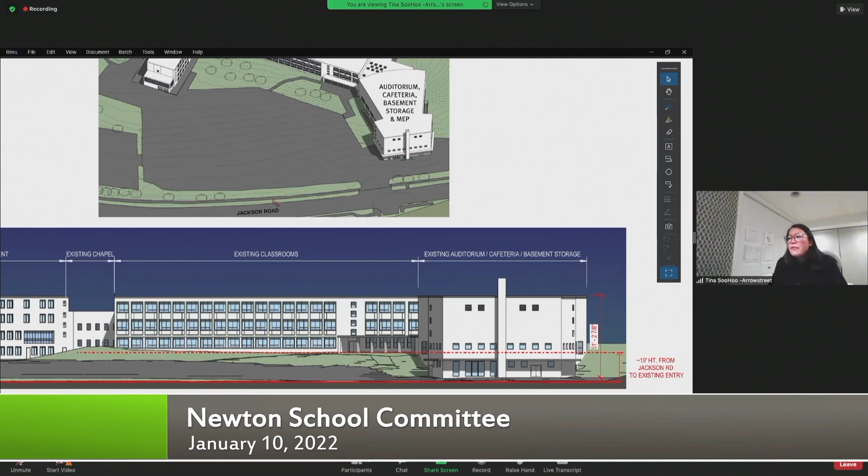And then this lower level is the basement. It's basically like a walkout basement where there's the mechanical rooms, the boiler rooms, and storage. But you'll notice there's a dashed line here — that's actually the first floor of the classrooms, and then the solid red line is the street. So there's a 19-foot height difference from the street, from the sidewalk, up to the first floor of the classroom. We wanted to point that out because when you're out on that site, it's a little hard to tell, since there is quite a length from the road to the front door.

These are a couple of building sections, and I'm going to zoom into this key plan so you can see where the sections are cutting through. The first section cuts right through the classroom bar and across the site, across the parking lot.

To Jackson Road. The second building section cuts through the lobby, the existing lobby, and right through the auditorium. Below the auditorium is the cafeteria, and below that is the basement where the Newton School storage, maintenance, and workshop are located.

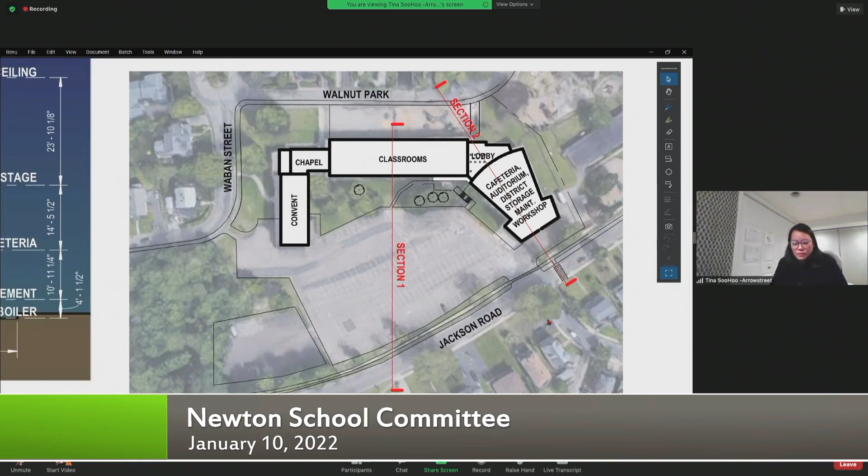So first I'm going to point to this site here. This top diagram is cutting through the classrooms, and you can see it's quite a distance from this exterior wall across the site to the street.

Again, it's a 19-foot height difference, and this distance is approximately 300 feet. So we have that distance, but we also have that height to deal with. Bringing pedestrians up 19 feet, we have to think about steps, stairs, and ramps that are accessible and meet code.

This other building section is cutting through the lobby, as I mentioned, and through the auditorium and the cafeteria. You can see that several floors, or a portion of the floors, are submerged in the grade because of the sloping nature of the site.

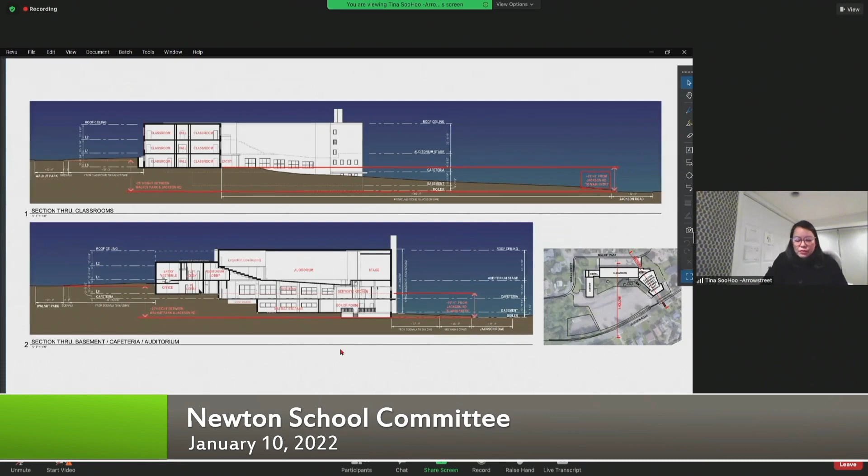So they're able to take advantage of having a fair amount of storage below, but also access from the street. There are also some half levels that take you down to the cafeteria and up a level to the auditorium. So internally, there are some heights that we are also managing with this design.

And on to design options. When we last presented to the school committee, we presented some ad/reno options, and we also presented some new construction options. The new construction options are now eliminated, and we're looking only at addition renovation options.

We had presented 6 of these options, and since then we've further developed and studied a few more, so now we have a total of 14 options that we're looking at here. A lot of these options are really trying to study the relationship of the new addition to the existing building, making sure that the space programming and educational plan fits within the existing building as well as the new addition.

We looked at potentially demolishing a little bit more of the existing building and potentially providing a slightly larger new addition. And then similarly, we looked at a number of site configurations.

Meaning where the blue zone may be in relationship to the site and the building, where the van drop-off and pickup locations are, as well as the bus, and those relationships to each other are very important for how you approach the site, and from those drop-off and pickup points to the building entry, but also looking at where the main entry may be, where secondary entries are, as students approach the building from all sides.

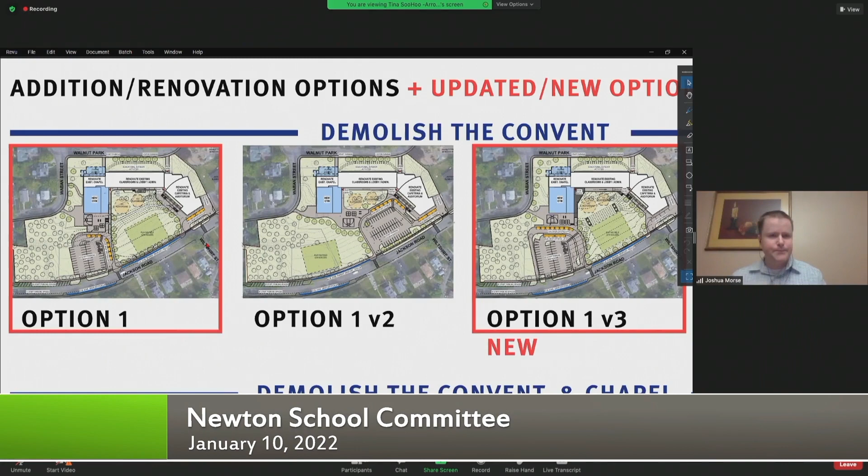Yes, absolutely. As Josh had mentioned, the cafeteria, it makes sense to try to renovate that, but also carve out some space that maybe can be used, for example, we had studied potentially an art room or music room. It's adjacent to the cafeteria, and there's space for that, but also maintaining the necessary area for a cafeteria. It makes sense to potentially keep the kitchen where it is, obviously renovated with new equipment, so it's up to date and serves the needs that the school needs.

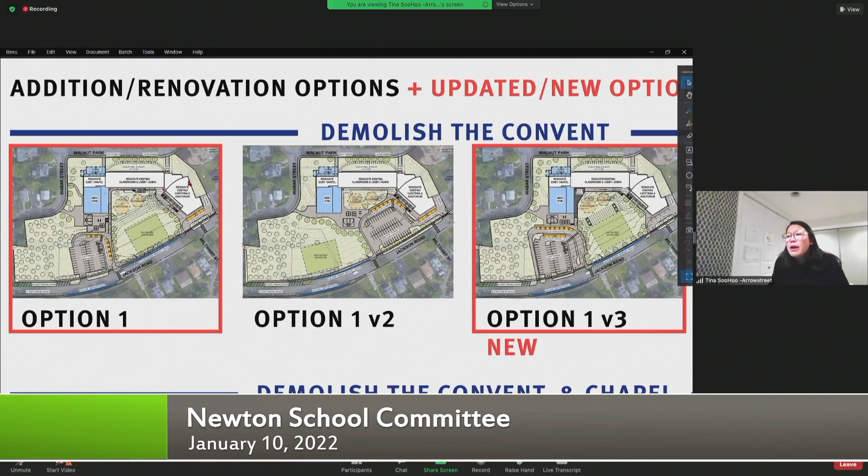However, you'll also notice that in a lot of these schemes where we are keeping the auditorium, we're adding a gym. So the new addition is a gym, since the existing building does not have any sort of gym space, or any space that's large enough for a gym, which is approximately 6,000 square feet. And with that, there's also some additional new spaces that would be required to meet the space summary and the program that the school is requiring.

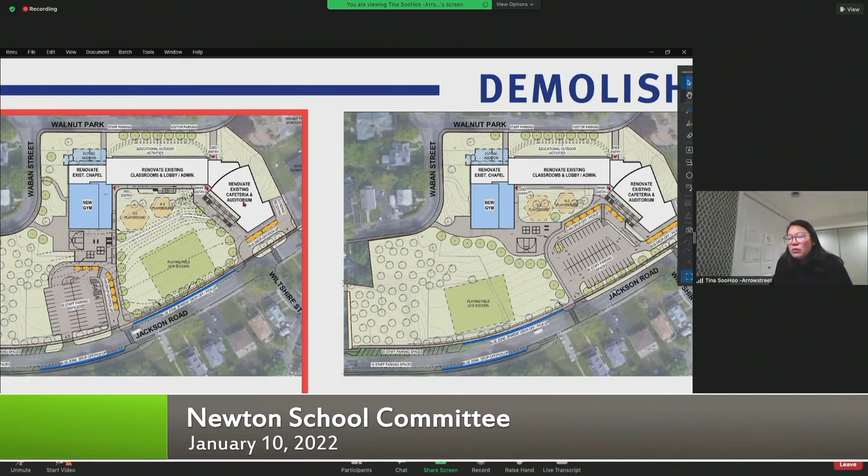I'll talk a little bit about the site plan. What we're really thinking is that having a gym on one end and the cafeteria on the other end, it makes a lot of sense to have the outdoor play space in the center. So you can understand that with recess and lunch, there's a good relationship between the two, but also with gym, PE, and the playing field or the blacktop, there's a good relationship as well.

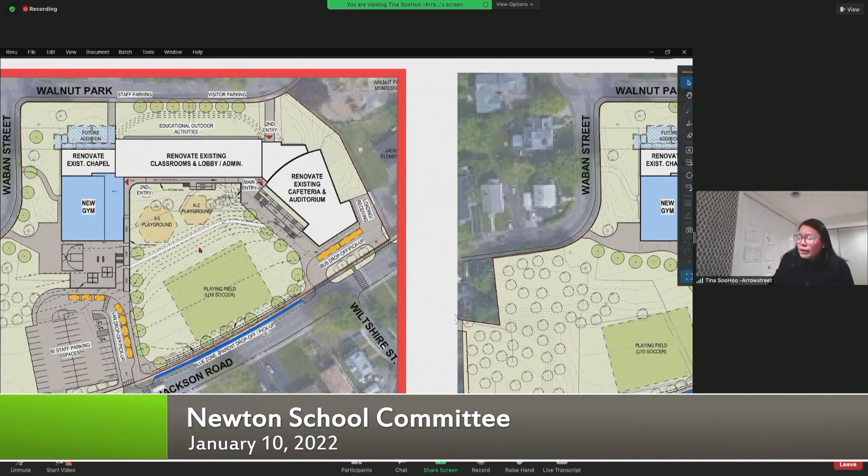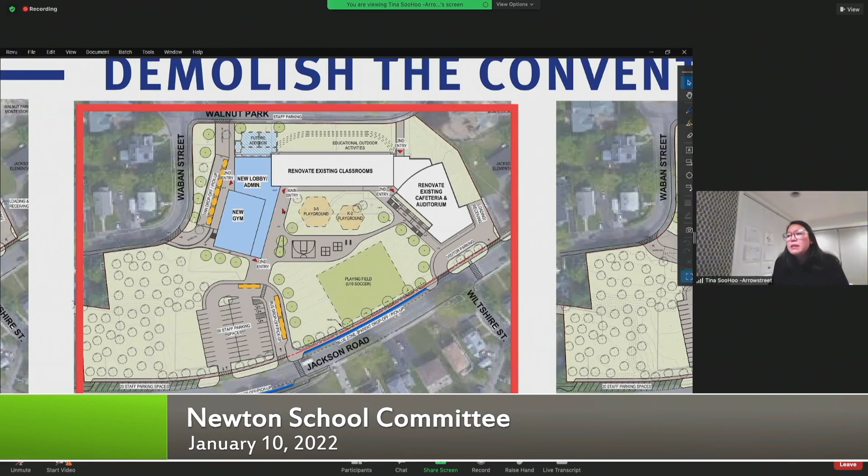So for scheme 2, I'll just pan over here so you can see. In this scheme, where we are looking at potentially demolishing the chapel as well, that really gives us an opportunity in terms of a main entry, a new lobby, and admin space that has a nice connection between the gym, the new addition, and the existing building.

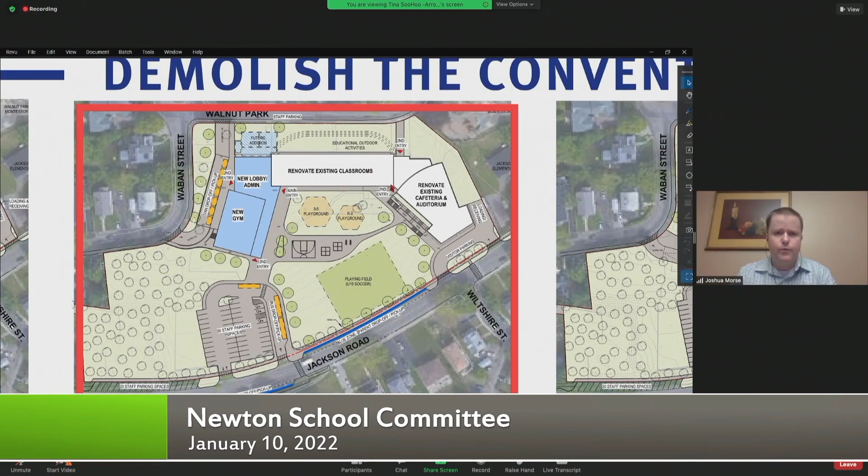And then the last question the mayor asked was, we're currently looking at 3 options that are scoring highest. How do we get from 3 to 1?

Ultimately, when you look at those three options, they're very, very similar in many ways. One could make a case that you could pick any one of those and the preferred option could evolve into any of those three models. So ultimately, what we're trying to do tomorrow night is give our design team as much clarity and specificity as we can. But for instance, I would fully anticipate that regardless of the option selected, the exact placement of the gym, whether it gets angled to open up the courtyard or if it stays more 90 degrees, is something that will continue to be studied.

Anybody that remembers the Cabot school project, we slid that gym around a few hundred times before we finally found exactly where we wanted it. That happened well after the preferred option votes. Just one example of things that will continue to be evaluated.